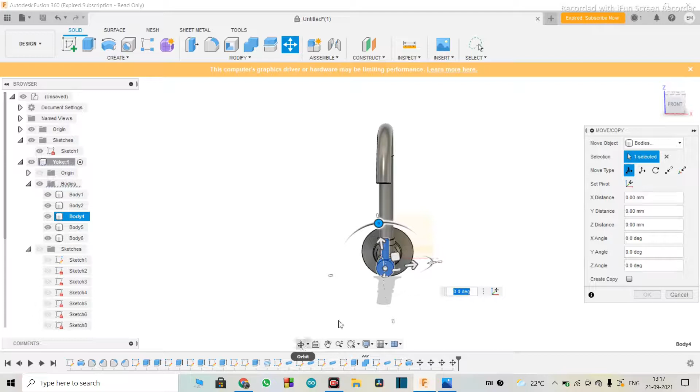In this video, I'm going to make a door lock. Even that's pretty simple to do. I'm just making whatever comes to my mind, and even you should try it. It's really fun to do. Let's start with today's session.

So let's start with today's session. To be honest, I don't have any reference, images, or dimensions. Whatever comes to my mind, that's what I'm going to design today. Let's see what we get in the end as the final product.

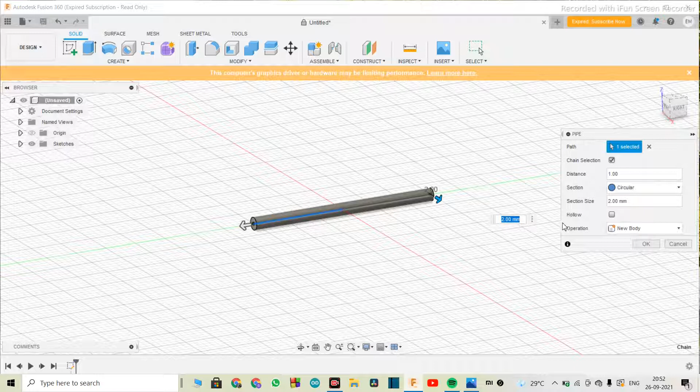I'm just going to start randomly, so I've selected the right plane. I'm going to construct a line 30mm long, that is 15 on each side, and finish that sketch. Now select both lines, and I'll convert this into a pipe of, let's say, 2mm.

This thing actually became 15mm. I wanted it to be 150 - 150 on the right hand side and 150 on the left hand side. Okay, so there it is.

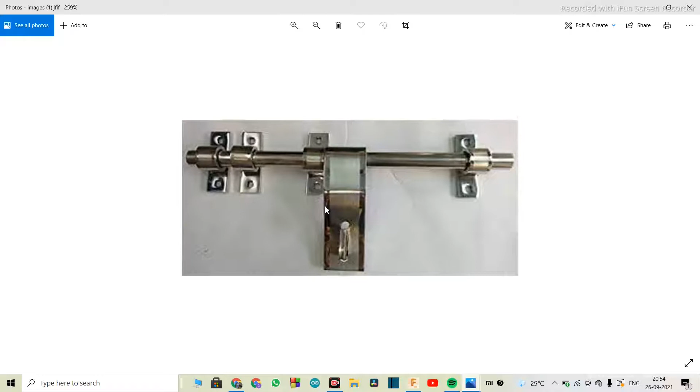I'm not making any complicated lock, I would say. Let me show you what I mean. A simple door lock - let me download this thing and open it up for you. So this is what I'm trying to construct: a simple old school looking Indian door lock.

This is the cylindrical pipe, you can say, and this is going to be the handle. This is just a slot made for the lock to go, and these are just a few supports - a total of 4. Three of these are going to go on the door, and one will be mounted on the wall. As soon as all of these align, you can just slide it like this inside, and it locks the door. So that's what we're trying to construct - extremely simple.

So your cylindrical pipe is ready. Now we'll make the remaining portion of this thing. Let's give some finishing touches to this.

The edges are extremely sharp on this, so I'll go into chamfer and select this. Control hold as well and select that, and we'll give a chamfer of 0.5 or 1 - 1 looks cool. Yeah, 1 right there.

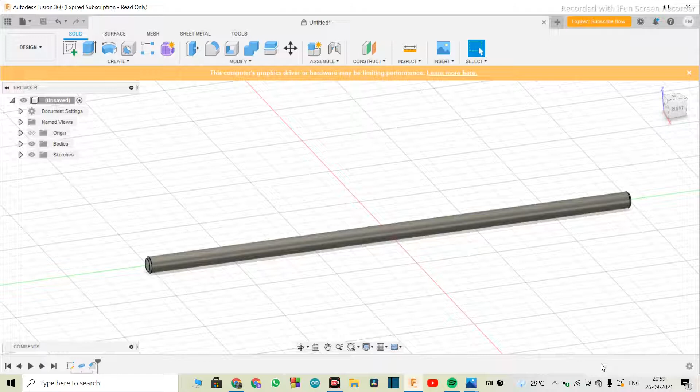Now we have to make what we call the handle for this cylinder. Let me construct a handle now. For that, I'll start with the center, and I want the upper part of the handle to be 30mm in length. Let's make that 30, and then I want that handle to come down for 50mm.

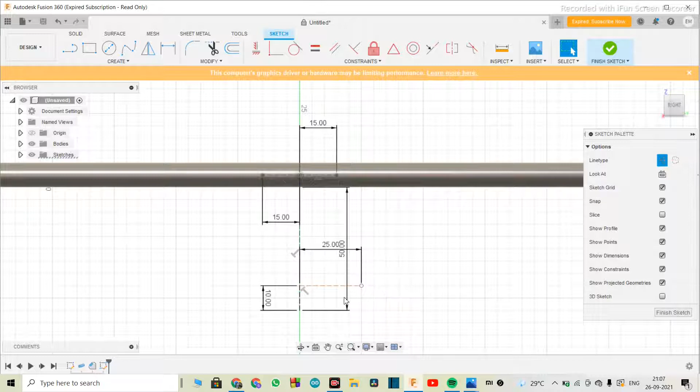Let's make another construction line of 10mm, and from there we'll make a horizontal line of 50mm, so that's 25mm each side. Now we'll go to simple line and connect all these points.

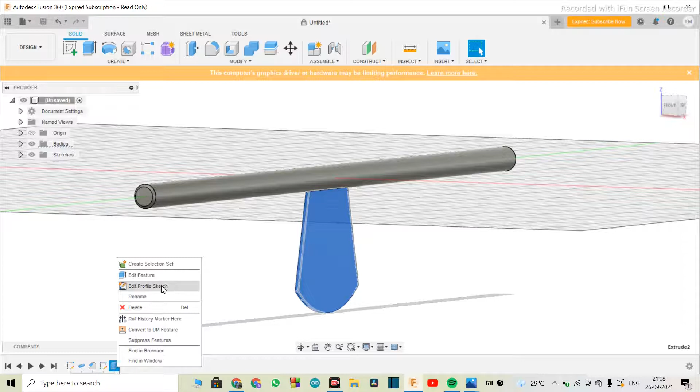Then I'll use a 3-point arc to create an arc here. Now finish the sketch and extrude this thing. Let the operation be join, and we want this to be 1.5. It's better if we make that symmetric. Looks cool, right?

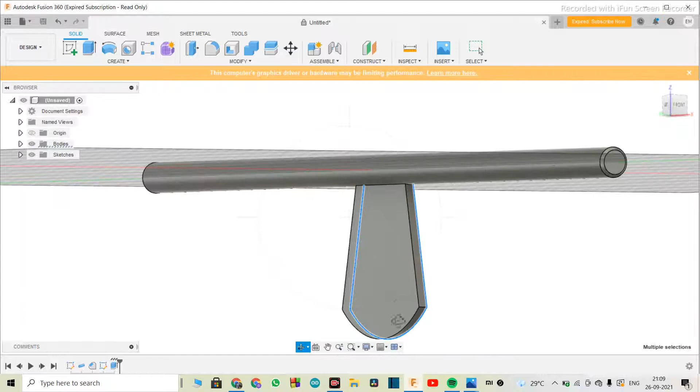Now even these edges are sharp, so we'll chamfer these edges as well. Control press and hold and select all those edges, then go into modify and chamfer. So a 1mm chamfer looks good. How about 1.5? Pretty good.

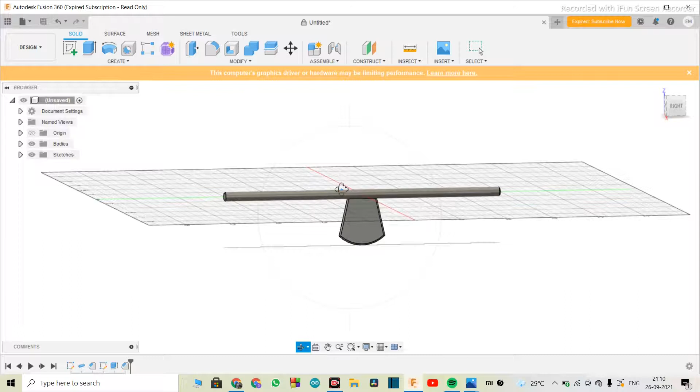Now we have to make the supports for this thing. Before that, we'll just move this thing around. Let me select this, go into move, and I'll just move it right there.

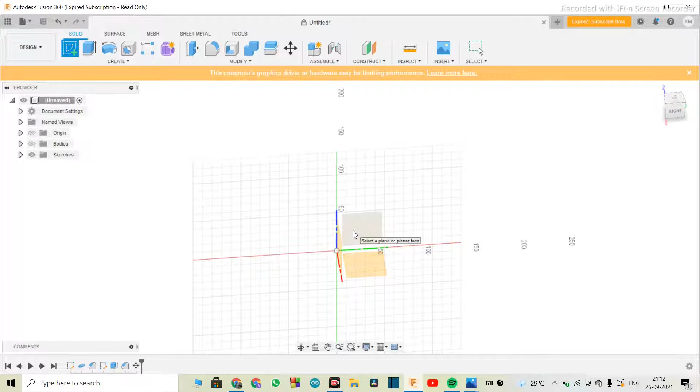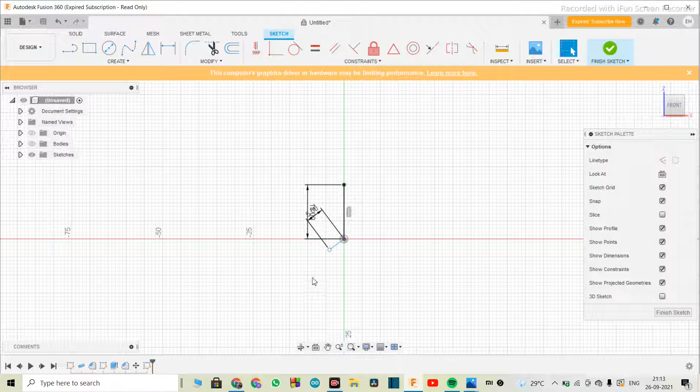Now I'll hide that body and start with a brand new sketch. This time I'm going to select the front plane, and now I'll construct a vertical line of 30mm, so that's going to be 15 up and 15 down, and I want that to be 1mm in thickness. Then let's just connect that up. Now what I'll do is make a construction line from here.

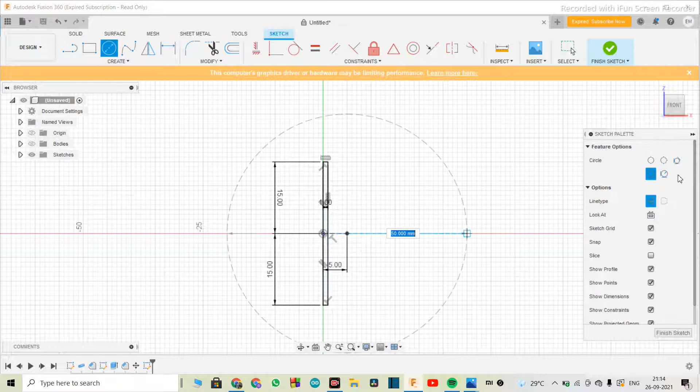Of 5mm, then I'll construct a circle - this has to be non-constructive type. We know the cylindrical rod is 10mm, so we want to have some play in between, so I'll make this 11mm. Let's make this 7 or 8, that would be great. Again we have to construct one more circle of 1mm thickness.

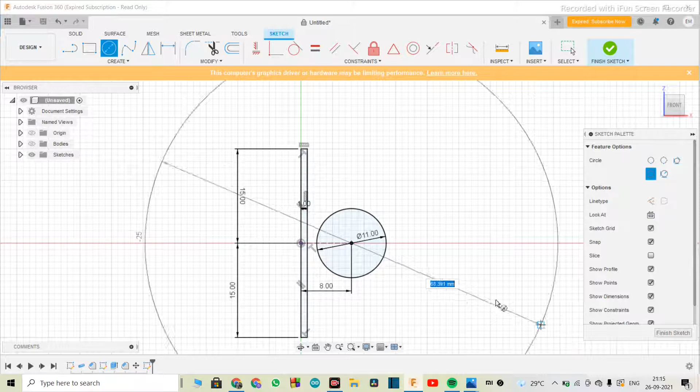So I'm going to construct another circle from the same center of 13 mm, and then I want a fillet here. I don't want this to be two separate parts or bodies, just a single piece. I want it to go like this, then take a turn like this, and that's how it should end. So we'll construct as per that.

I'll go into 3-point arc, then I'll just start from here randomly, and this is how I want it to be.

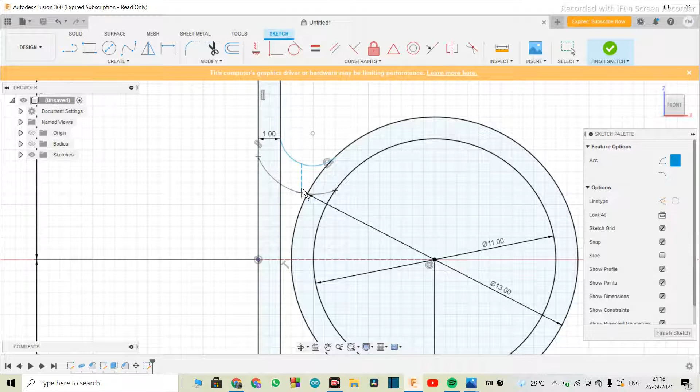Now the second one has to go like this. That looks perfect.

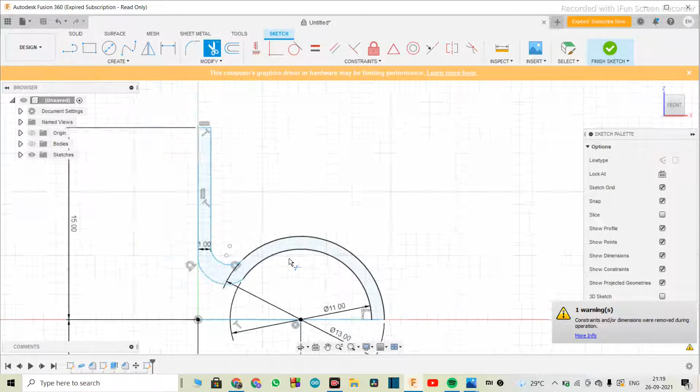Now I'll construct a horizontal line from this point to this point, and I'll just trim this out like that. And then I don't want this, I don't want this, as well as this, and this. Looks cool, right? Delete this line as well.

Now I want all this geometry to be mirrored onto this horizontal plane. So I'll select this all up, go into mirror, object selected, select the mirror line. Oh shit, we don't have a mirror line. Don't worry, just turn on the origin and you'll get the horizontal red line. Select that, and there it is. That's how easy it is.

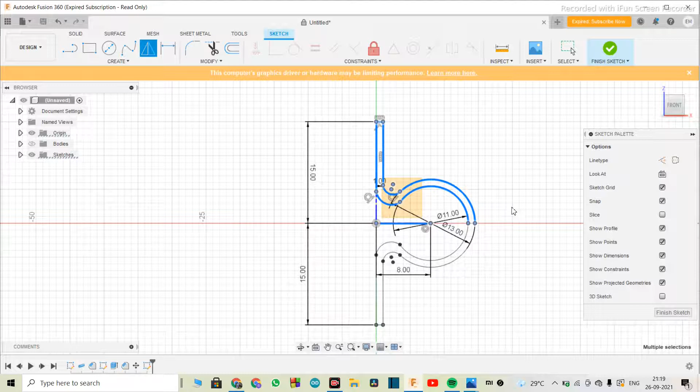Turn off all the dimensions. Looks cool. Now finish the sketch and then revolve it around.

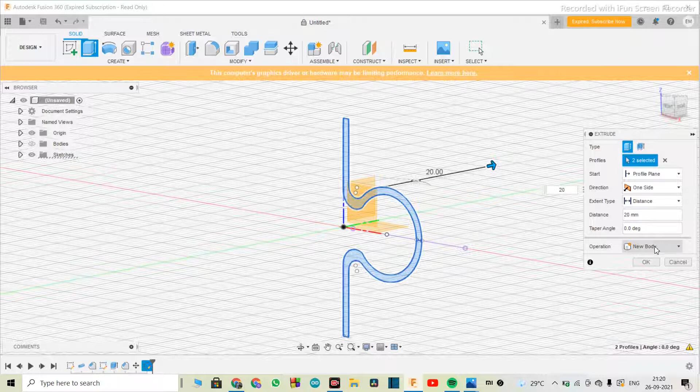I don't know why these two became separate bodies, but anyways, we'll select this and this as well, and let's extrude that as a new body for 20, a new component. Woo, man, that thing turned out really cool. See how that looks now.

So let's finish the sketch, turn off the origin. Again, these edges are sharp. We'll just fillet this as well as the bottom ones.

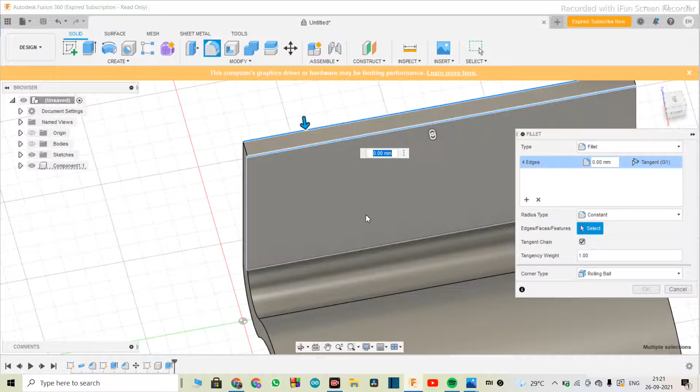Okay, so 0.5 looks pretty good on this. Yeah, that looks neat. Not bad.

What else is remaining on this? Okay, we need 2 holes on the top and one on the bottom here so that we can mount it on the door or the wall.

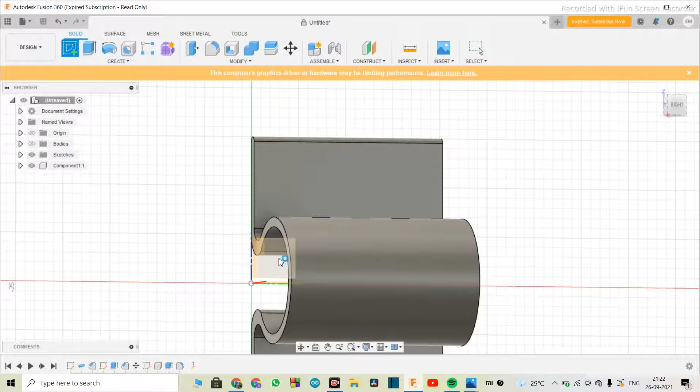Let's go back to sketch and select the right plane, and then I'll construct a construction line of 10, and then a vertical line of 10, and then I'll construct a circle on top here of 5 mm in diameter.

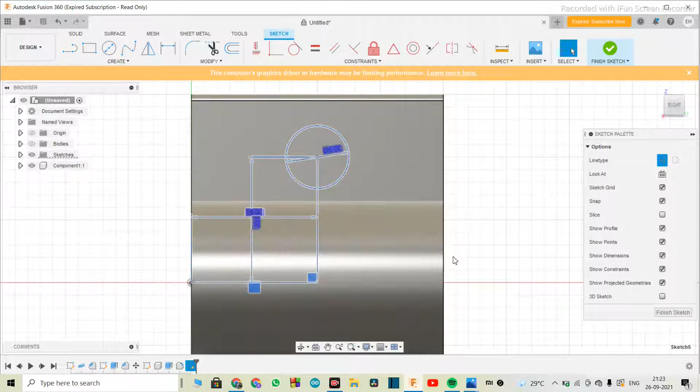Wait a second. That circle has to be a regular circle.

And I'll just mirror this thing down. Select the mirror line as this horizontal line and just hit OK. So that is how you do it.

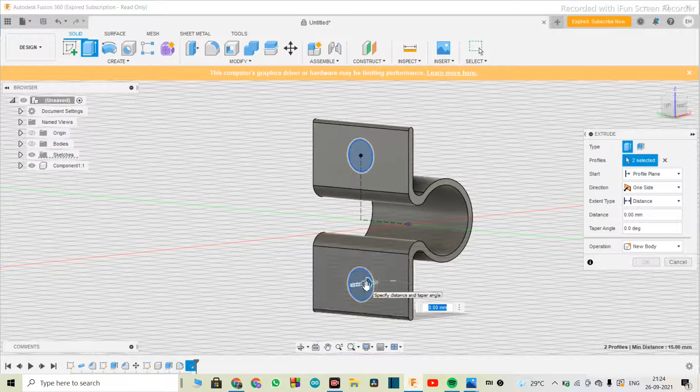Finish the sketch, turn on the component. Select both of those circles and extrude them, and just cut them out. Wow, looks really cool.

Okay, so this is going to be the support for the horizontal rod. So let's turn on that thing. Where is that? Okay, so there it is.

What else we are left with? That we have to see first. Support. This will go inside the support. Okay, so we have to make some locking mechanism here.

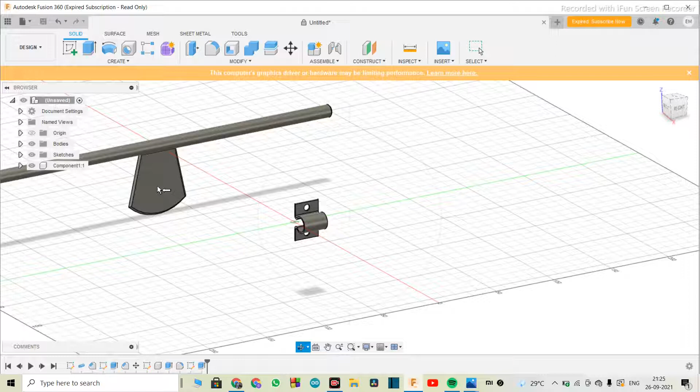So for that, let me select this, go into sketch, turn off this component. So I want a slot right here so that another body can come inside this, and it will have a circular hole where I'm going to put a lock.

Now I'll make a line. I'll make a construction line of 20 mm. Then there I'll make a rectangle.

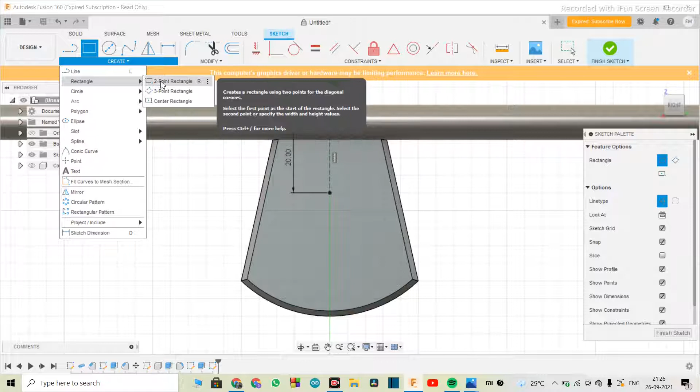First I'll create one more horizontal line of 2.5 mm, and then I'll make a regular rectangle of 5 mm by 25 mm.

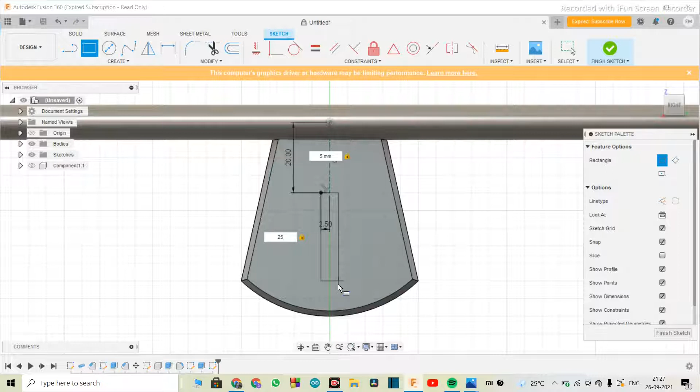Let's cut that part out. Okay, not bad.

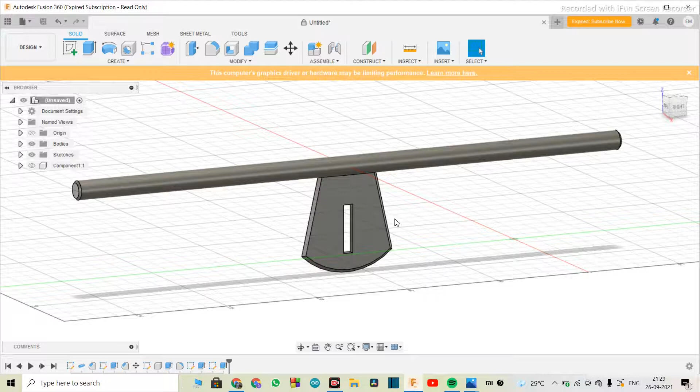So let's make another body that has to intersect this part so that it must act as a lock. So let me hide this thing first. I'll move this thing to the left hand side.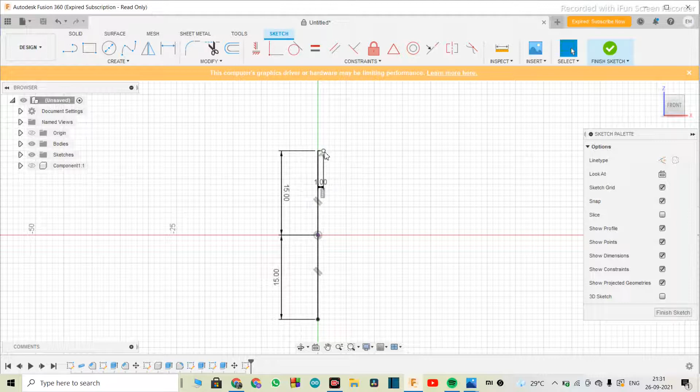Now I'll go into sketch and then select the front plane, hide the first component, and then I'll make a line of 30 mm, that is 15 up and 15 down. Let's keep this as 1 mm in thickness.

Then make a construction line of 20 mm, or 10 mm vertical. Then...

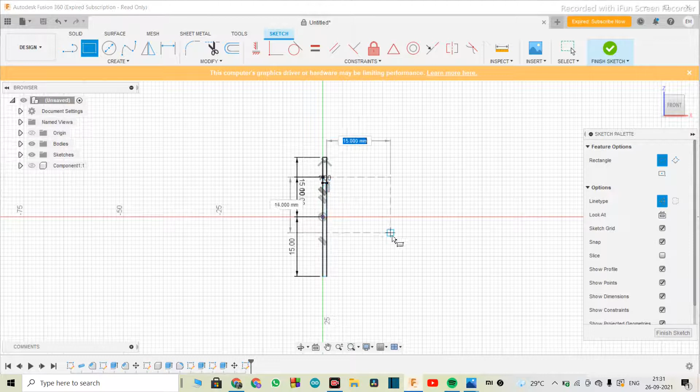From there we'll make a regular rectangle of 15 by 20. Twelve by 20 is perfect.

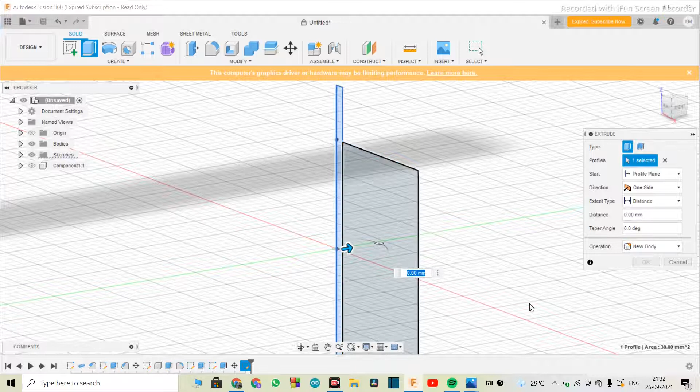Now finish the sketch. Select this. We'll extrude this for... want that to be 30, so that's 15 on each side. Looks good.

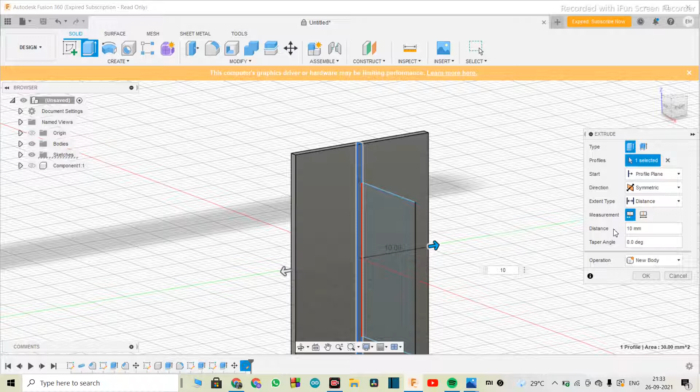Or how about 10? 10 on each side is more than sufficient, I would say.

Now select this plane and extrude this symmetrically for 0.75. That's cool.

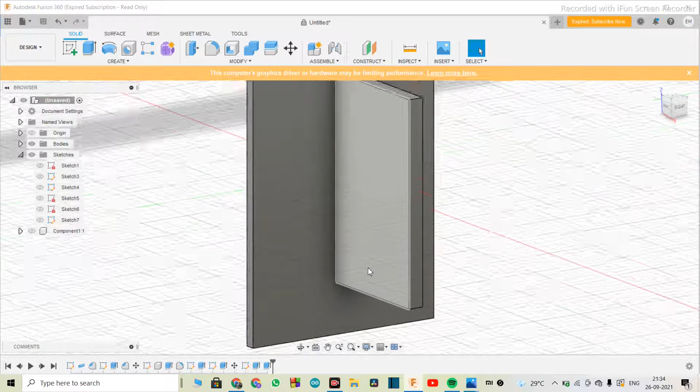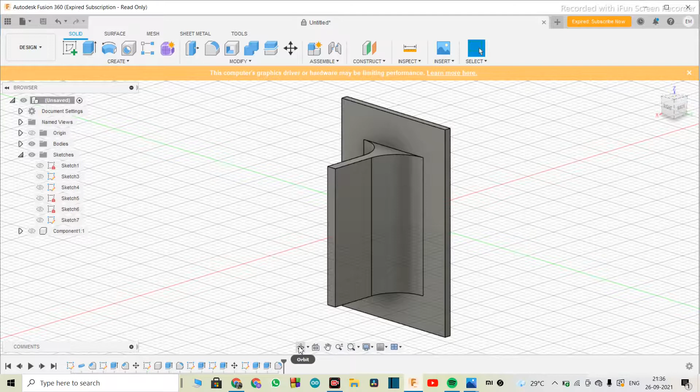As well as this, and I want this to have some round edges. I'll try to make this as... oh, that's too big. Not bad. Perfect, so I have kept that as 5 mm on each side. Looks pretty good.

Now I want even this to have a little bit of fillet.

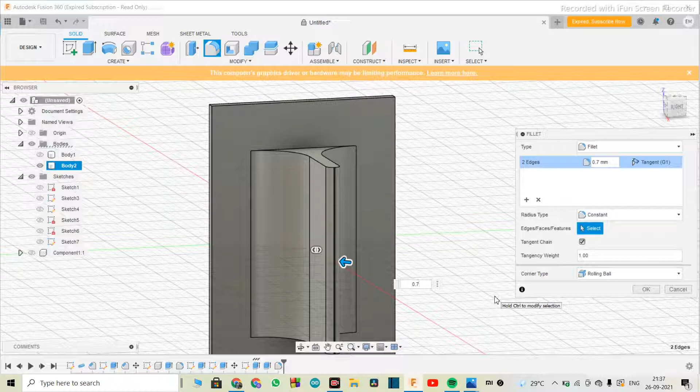Point seven looks cool. Yeah, not bad.

Now we want here one hole, so even that we'll make now. For that, let me go here into sketch, select this plane, and make a construction line.

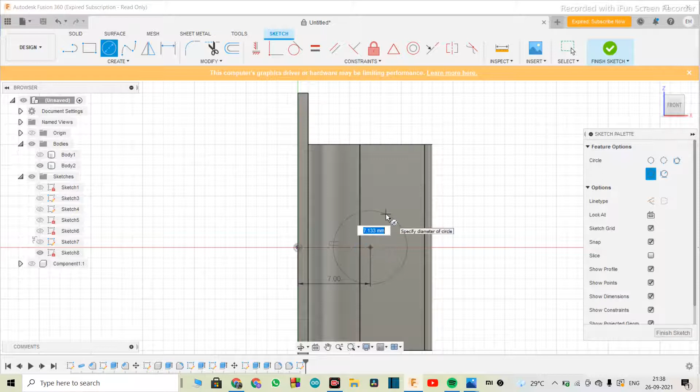Let's keep that as 7. Now make a circle of, let's say, 5 mm.

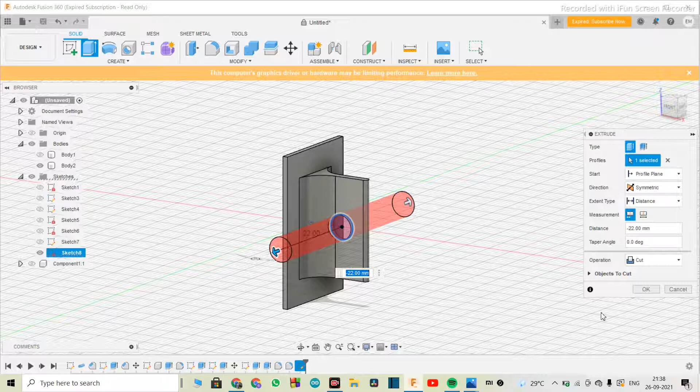Let me extrude that out. Make it symmetric, just pull that out. Hit OK. So there it is.

So let me just try to assemble it right away to see whether it fits or not, or else we can do some alterations. So there it is. I just have to move this thing around just like that. Take this thing.

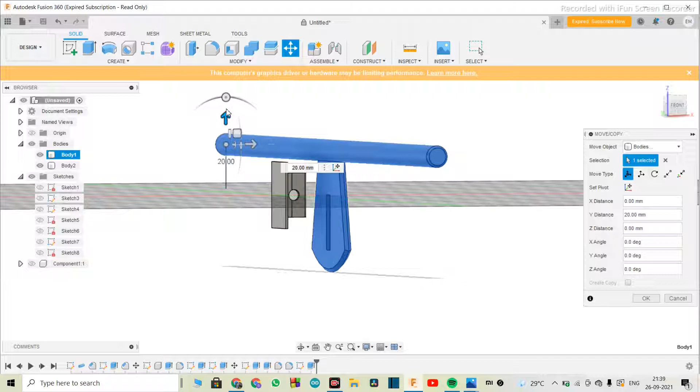Okay, everything looks pretty good. Let me just rotate this thing just a little, like 10 degrees. First I'll keep that as 0, then I'll take it here.

Let's make this as negative 2.5. Perfect. A little behind, negative again 2.5, and tilt this for.

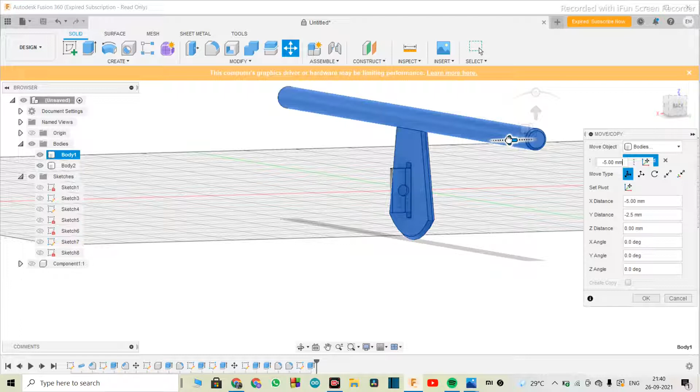Again we'll take this a little behind, and then we'll tilt this just to give it some realistic looks. Yeah, not bad.

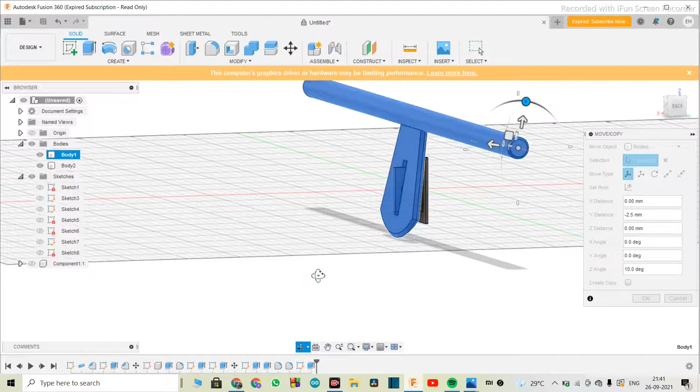I think we need to extrude this thing just a little more. So this is that sketch. Go here into edit sketch.

How about making this as 17. You can always edit it. That's the beauty of this software.

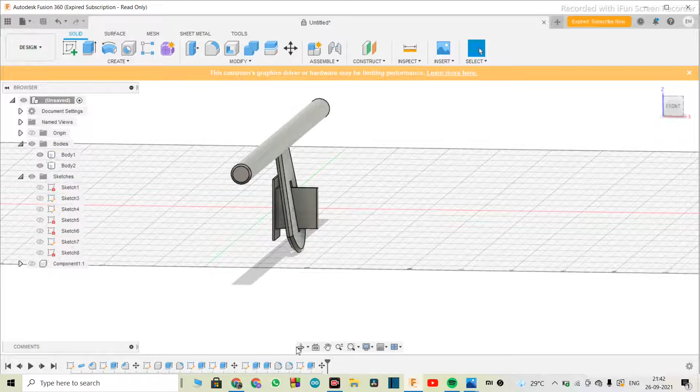Let's make that as 20. And we want that circle to come a little forward. That as well we will edit it. Make that as 20.

A little more. Yeah, perfect. Oh, that's perfect. That is what we were looking for.

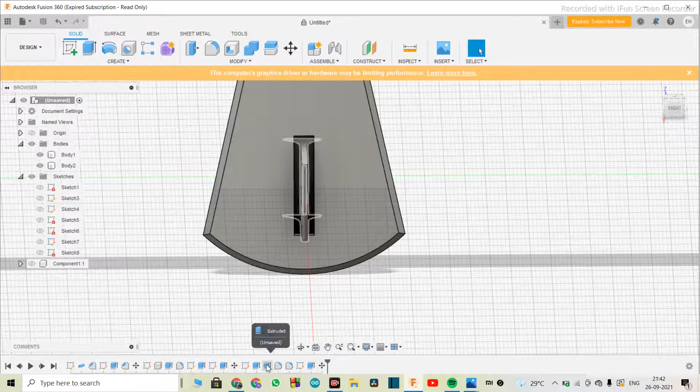I think even this has to get a little thick. So here it is. No, that's fillet. No, that's extrusion.

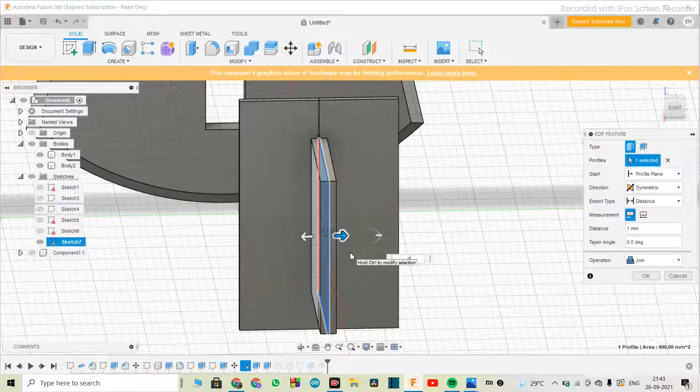I want this to be 1.2. Looks good. We can still increase it a little bit, but that's enough, I would say.

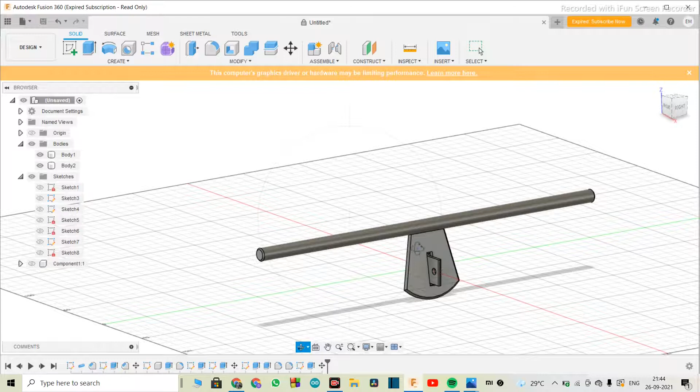Now let's bring those spacers. Okay, I forgot to make holes here, so we'll make that as well. Let me just move this thing.

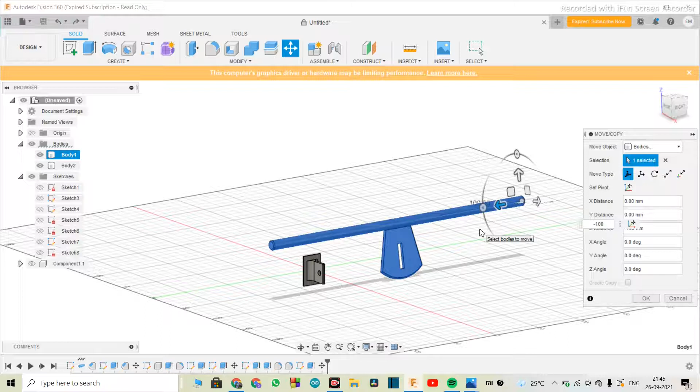Now I'll select the right plane. Now here I want to make a few holes. Go here into construction. I'll construct a line of 6 mm.

From here I want a vertical line of 10. Another line of 5.

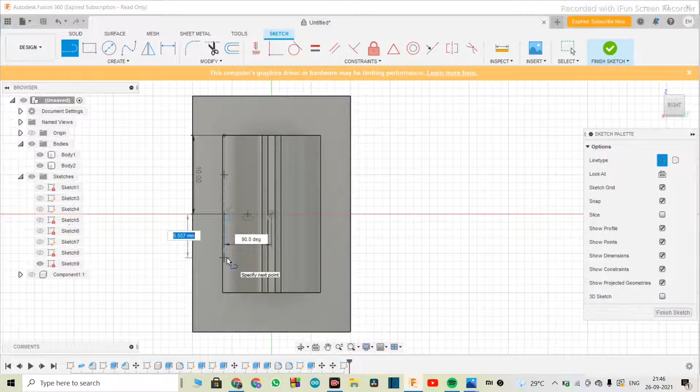Now I'll just hide that out and then make a circle here, not construction, of 5 mm. Then I'll create another circle down here of 5 mm. I'll just...

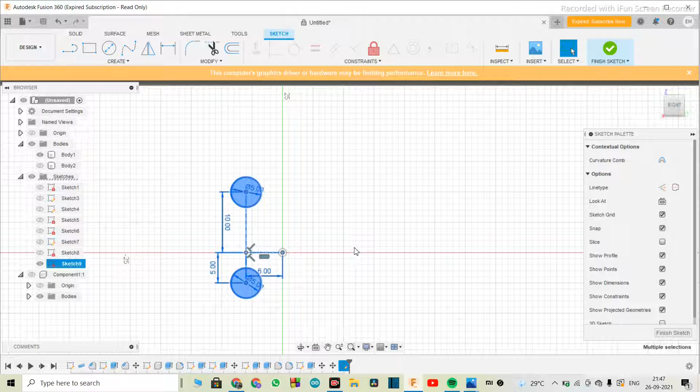Copy this thing and I'll paste it, and I'll just drag it like this here. I'll just move this thing around.

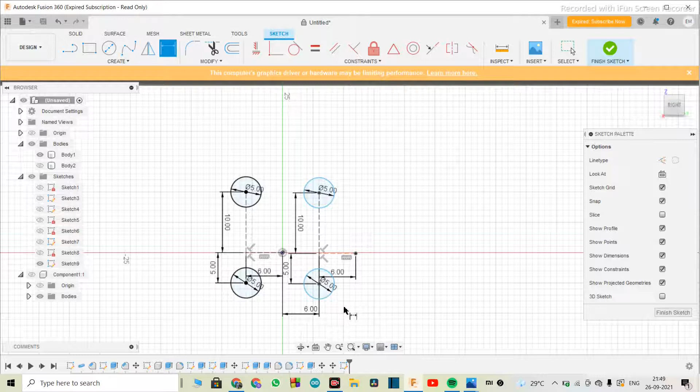And then I'll go here into sketch dimension and select these two points, and I want this to be 6. Let's turn on the body. Then we'll select all these circles and then I'll just extrude them and cut them out.

Okay, so that is where the bolts are going to go on this thing.

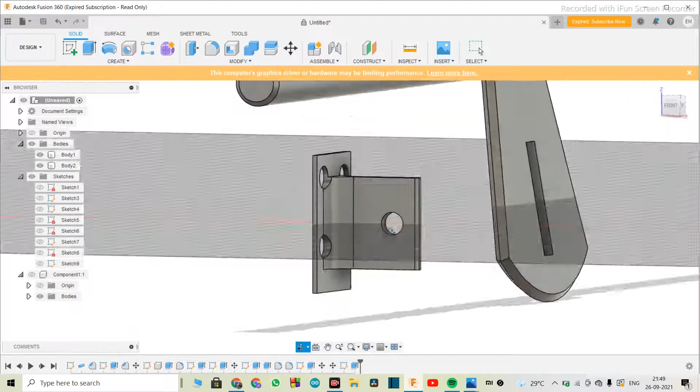This side I wanted it to be slightly lowered, so let's edit this, move, again I'll go into sketch dimension, select this.

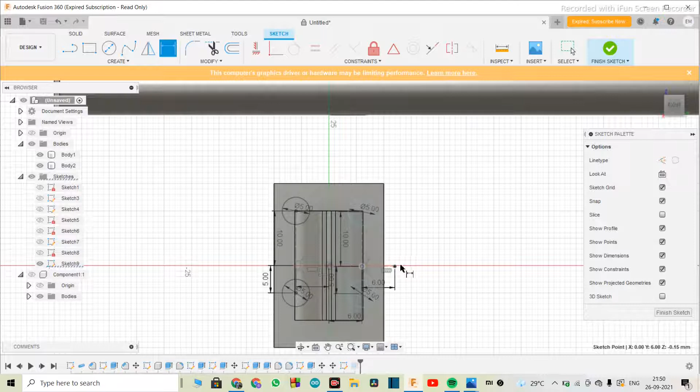I want to move this thing slightly down, like that.

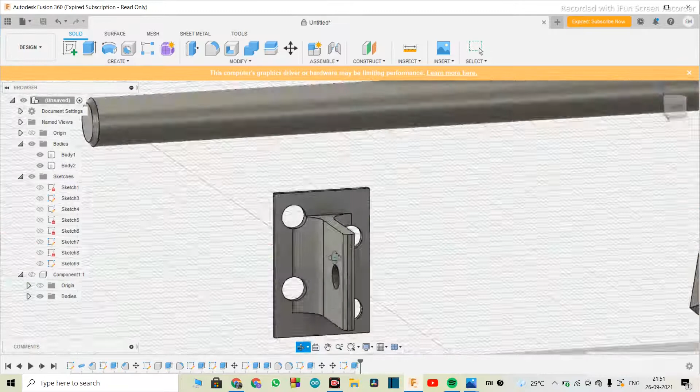Okay, so that's what I was talking about. Looks pretty good now. Now 4 bolts are going to go on this, 4 bolts or screws.

Now almost everything is ready. We just have to assemble all the parts. So where's the other component? Yeah, there it is.

Now let's start mounting everything. I want to move this thing here 100 mm. Hit OK. It's right on place.

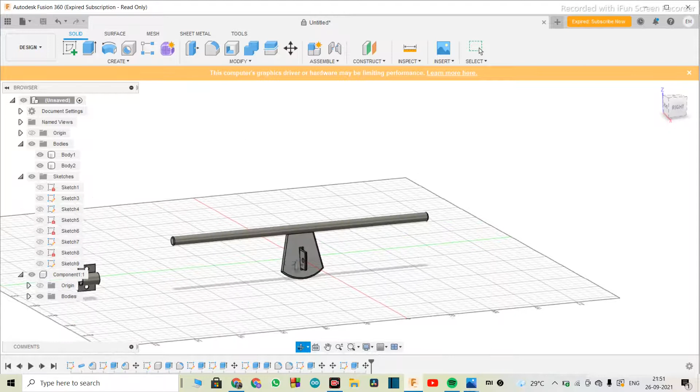Now we'll make some copies of this thing. Go here into copy, create a copy, drag this thing around, hit OK. Again go here, select this, create a copy, repeat this until you have 4 of those.

Okay, once you have 4 of those, we'll assemble it. So now we'll select this first.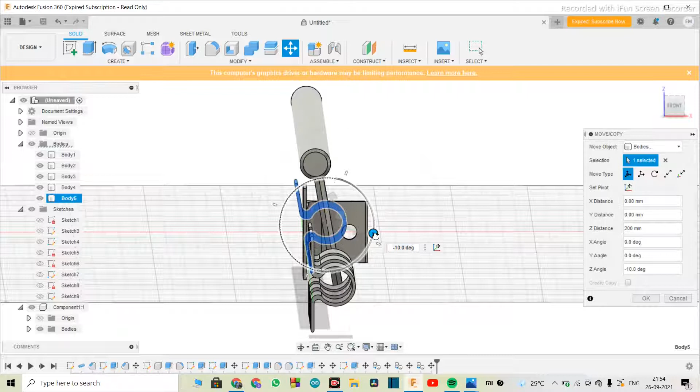Make this as 200, and then I'll just make that as 0 degrees, hit enter.

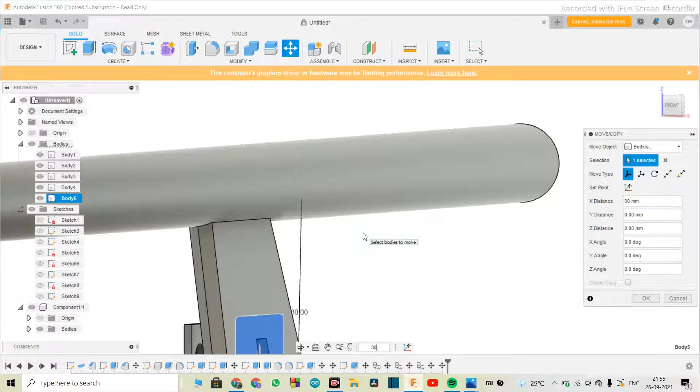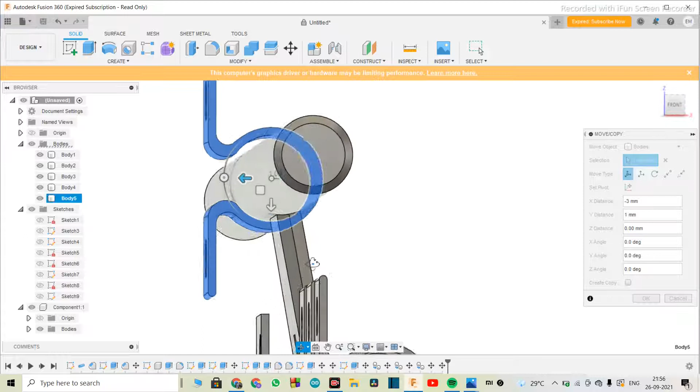So just keep playing with the numbers until you get it in the position you want it to be. So it's almost there where I want it to be. Okay, that looks perfect now.

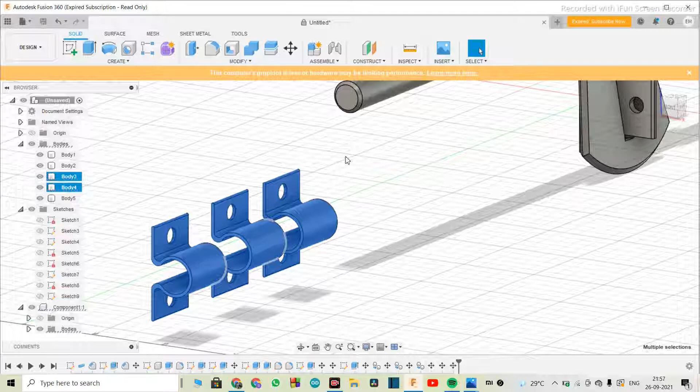Better than assembling all this, it's a lot more headache to take all this and match here and align it. So I'll just delete all of this and I'll go on making copies of this one, so that will be a lot easier. So I'll go here and select this.

And I'll just create a copy of that. So I want it to be here. Hit OK.

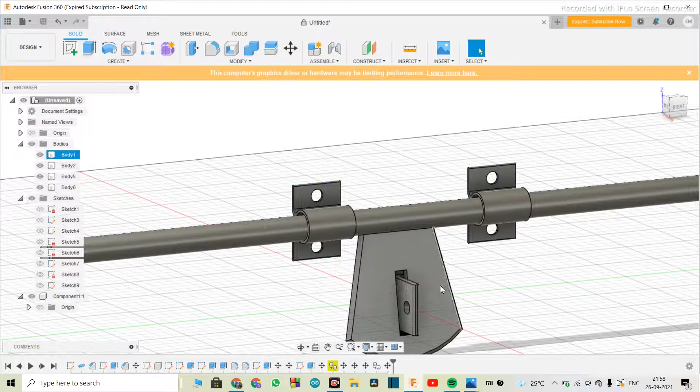Slightly here, okay. Now one more I want. It to be here. Hit OK.

And the fourth one has to be on the wall, just like that. Hit OK.

Finally, it looks really cool now. Wow man, that thing turned out really good, better than what I had expected it to be.

Now let me demonstrate how it's gonna work. So this is the body one. I'll select that, I'll go here into move. So, oops.

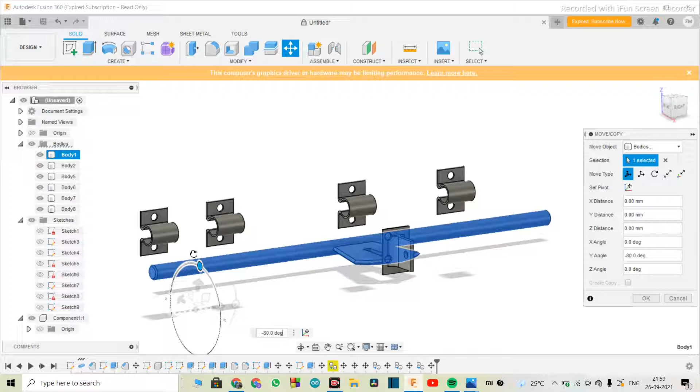So that is how it is going to lock and unlock. Okay, so this is how it is going to lock and unlock.

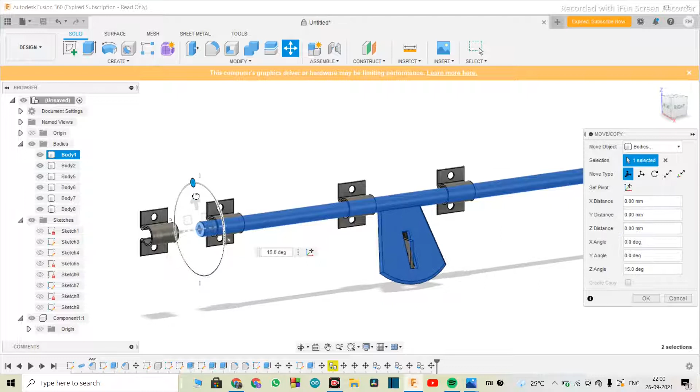So once you take this up like this, then you can slide it in or out like this to lock it or unlock it. Wow, that animation looks so cool, right?

So here it is actually getting intersected, so we'll just move that around a little bit. So let me select this one and move this thing just around here. Would work out, I guess.

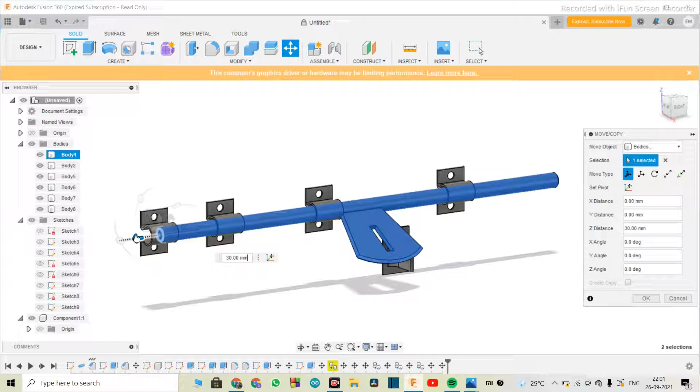Select this point, move it. Let's open the latch. Okay, so the latch has been opened. Let's slide that. Okay, now that works really cool.

And that is how a basic lock mechanism works.